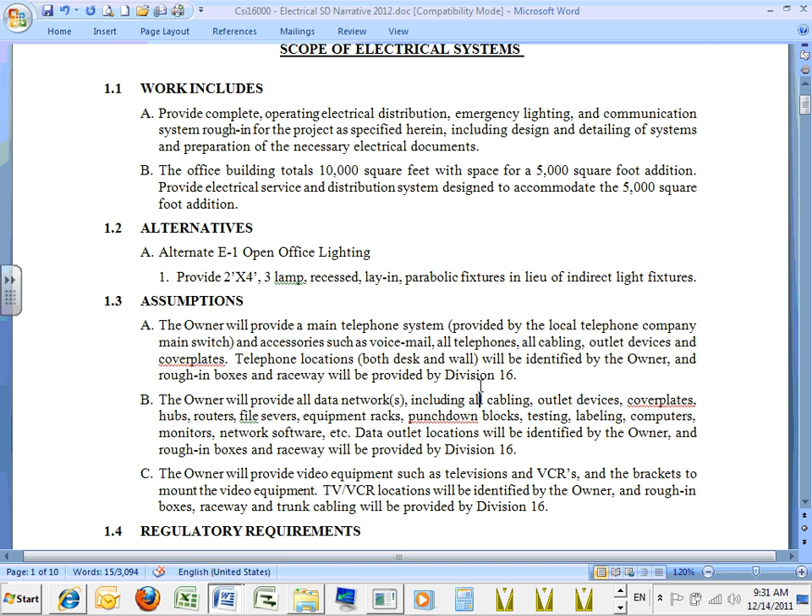Some of your assumptions: the owner will be providing a telephone system, accessories such as voicemail, telephone cabling, outlet devices, and cover plates. Telephone locations will be identified by the owner, which is Chad. And rough-in boxes and raceway will be provided by Division 16, so that's you guys.

And in Revit, they do have the ability to put in conduits if you want to take that on, you can, otherwise you can just do it with keynotes.

We'll provide all data networks, including cabling and outlet devices again. And you're going to be responsible for the rough-in boxes and raceways.

Televisions and VCRs, your video equipment, will be provided by Chad again, the owner. The locations will be identified by the owner, and rough-in boxes, raceway, and cabling again provided by Division 16.

Joe, do you want to say a few things about the low voltage? Because that's always been the confusing part. How do you guys do it?

And this as well? The way we originally decided to do this project, which has changed, is the way that a lot of projects are done. We as a designer, in a lot of our projects, and it's actually changing again.

We'll design a rough-in only for low voltage data and voice. So we'll design an outlet with an empty J box right next to it, with a pull string, with a conduit going up into the ceiling with a pull string in it.

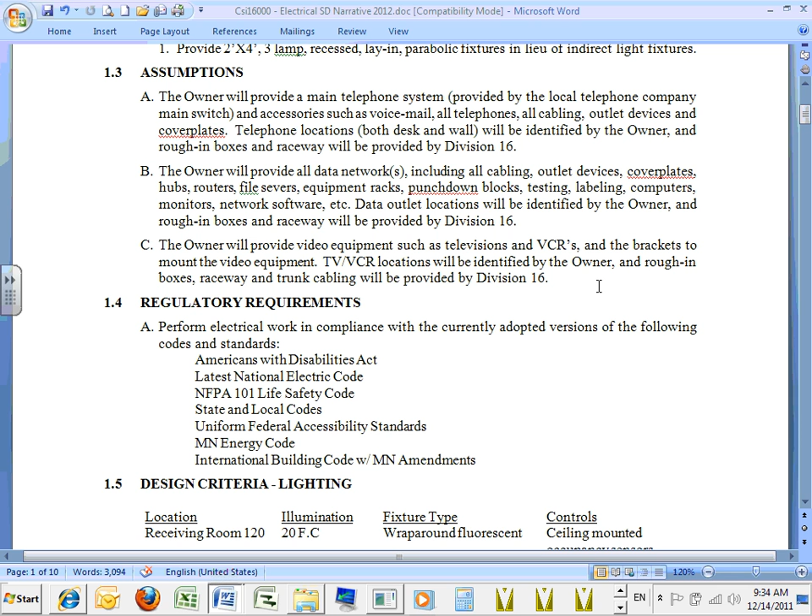Even now at Hallberg, we're starting to design more and more of our low voltage ourselves. It used to be a specialized deal that we kind of only wanted the data guys to take care of because we had enough of our own stuff to worry about. But even now, we're starting to do even more of that on our own, which with this project has evolved: we used to say rough-in only, now Chad's saying you guys design the data and the voice also. So he wants you to know where a voice outlet or jack is, where a data jack is, and the type of cabling you're using. So that's kind of the two differences of what is done.

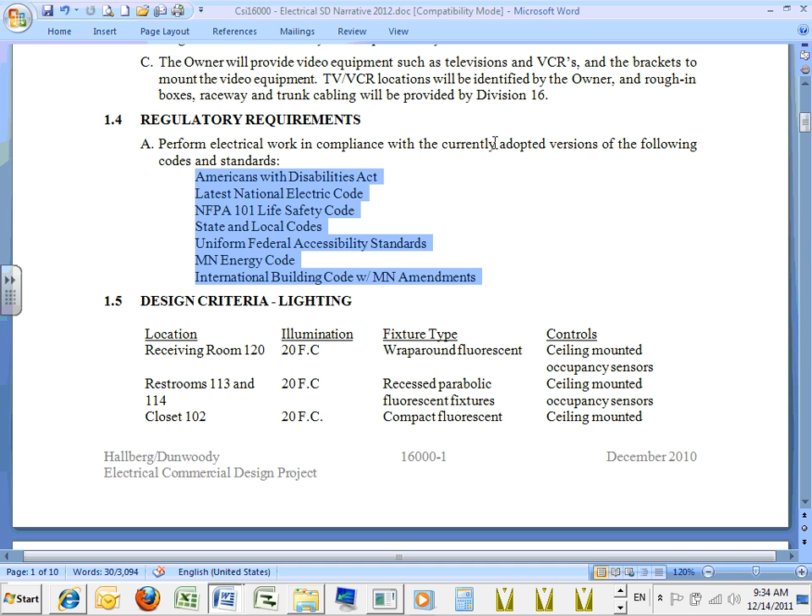Okay, so for your regulatory requirements, we need to be in compliance with the Americans with Disabilities Act, NEC, NFPA, Life Safety Code, state and local codes, Uniform Federal Accessibility Standards, Minnesota Energy Code, and the International Building Code with Minnesota amendments.

Below here is you have your individual requirements for each room. You guys will go through that with the individual to do your lighting calcs.

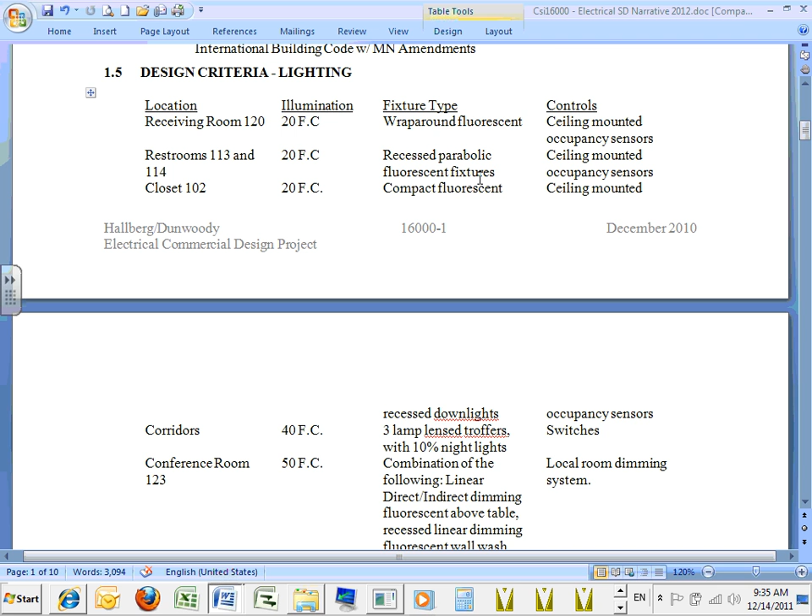I don't know that I need to go through each, I'll just say a quick summary. We're kind of giving you each specific room, how many foot candles, an average foot candle level that we want in each room, the type of fixture that we want in each room, and how we want it controlled. This document right here, we're giving you everything you need to design the lighting. And then as we move on, there's another section for power, where we say every single outlet that we want in each space also. So we're kind of giving you all the answers, in a way, in this document right here.

And I always say every year, and I always have a difficult time saying it because it always kind of comes off as arrogant. But if I was given this document at the beginning of a project right now, with what I know now, and this has all the answers, all the 73 meetings that I have to sit through with an owner at the beginning of a project to get all of this information — if I was given this right away at the beginning of a project, I think I could have this thing done in less than a week.

And you guys are going to be working on this project for 12 weeks. So use this as much as possible. Realize that all the answers are in here. If something doesn't make sense, obviously ask us and we'll clarify it.

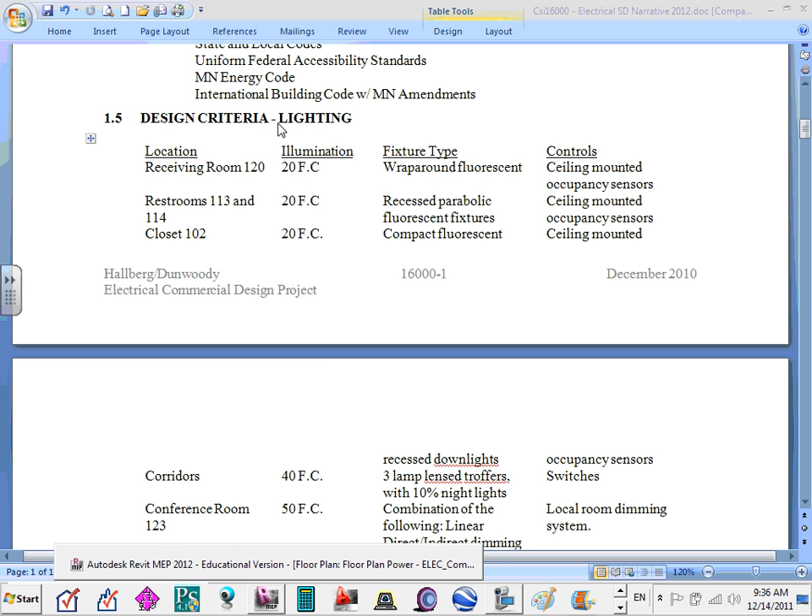One thing that was really unusual when I got out of school and into Hallberg, I thought this is what I was going to get per project. I thought I was going to get a sheet with the requirements and that type of stuff. It's nowhere close to what it really works. It's definitely a nice thing though.

Are you retained directly by the owner, or are you retained by architects? How is that? Both — oh yeah, we work for architects and we work for owners.

I guess we would probably rather work for an owner, direct with an owner, because then you don't have to go through somebody to get your answers. Because even when you work for an architect, depending on the architect, sometimes they want to be a part of every conversation. So you can't just call up the owner and say, what type of lighting do you want in your open office area? You have to say, hey architect, can I call the owner, because the owner is his client. So, but yeah, we work for both, and some architects are better than others. Some are great to work with. Some just say, do whatever you want and contact the owner directly, we don't care. And there's other architects out there that don't really understand what engineers, designers do, so they want to be in control. So we do both, and work is work, I guess.

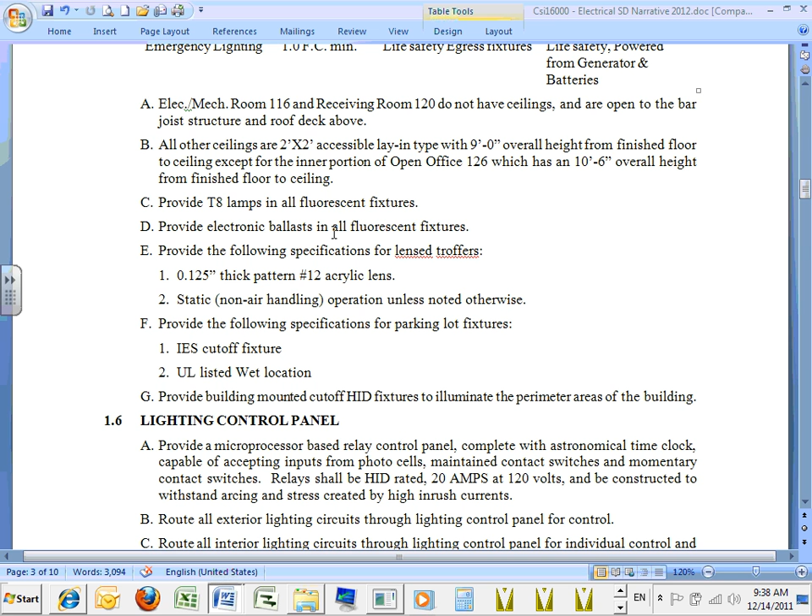So let's see here. We need to supply a light control panel with an astronomical time clock, with inputs from photocells, contact switches, momentary contact switches, and we're going to have those relays HID rated, 20 amps at 120 volts, constructed to withstand arcing and stress created by high inrush.

So we're going to route the exterior lighting circuits from the lighting control panel. The interior circuits will also run through the lighting control panel, and will be swept at the end of the day. Open office task lighting circuits will also run through the lighting control panel for timed on and off control.

So we've got a bunch of cubes at Hallberg, some of the J-boxes on the floor that will be running those circuits there, and those circuits will be run through your lighting control panel. The coffee pot in the lunchroom will also be on that lighting control panel for on-off control. So it's called the lighting control panel, but we're controlling the coffee pot.

So I don't know if you guys are familiar with the lighting control panel. It's also just a relay panel, but we're using it to control our lighting, and we're using it to control some outlets. We have task lights at each cube, and the task lights are actually plugged into an outlet. But at the end of the day, we don't want 50 task lights left on because people leave their lights on.

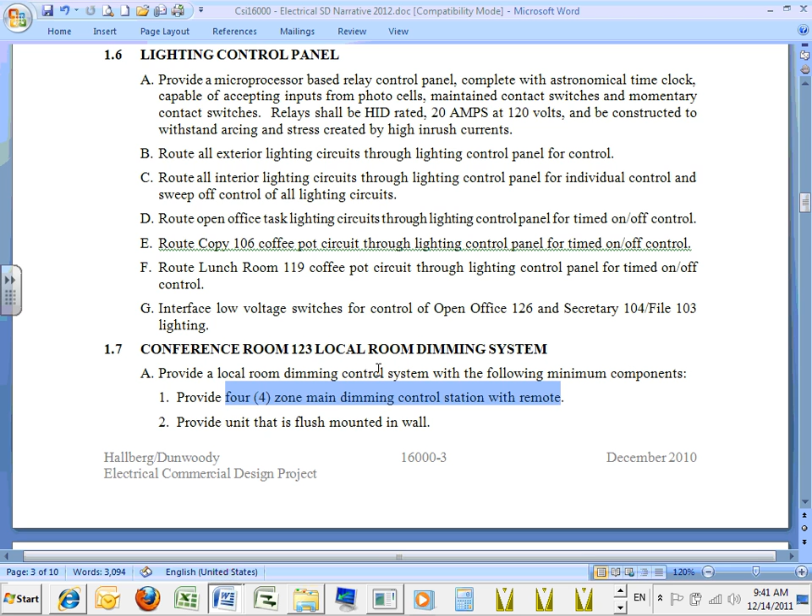We need to put in a dimming system on the conference rooms. It'll be 4-zone with remote, and it'll be flush mounted. We also want to provide required fluorescent interface modules.

And then below here we have your requirements for each room for the receptacles. You'll see that some of them are weatherproof GFI. We also have some notes, so make sure you pay attention to those.

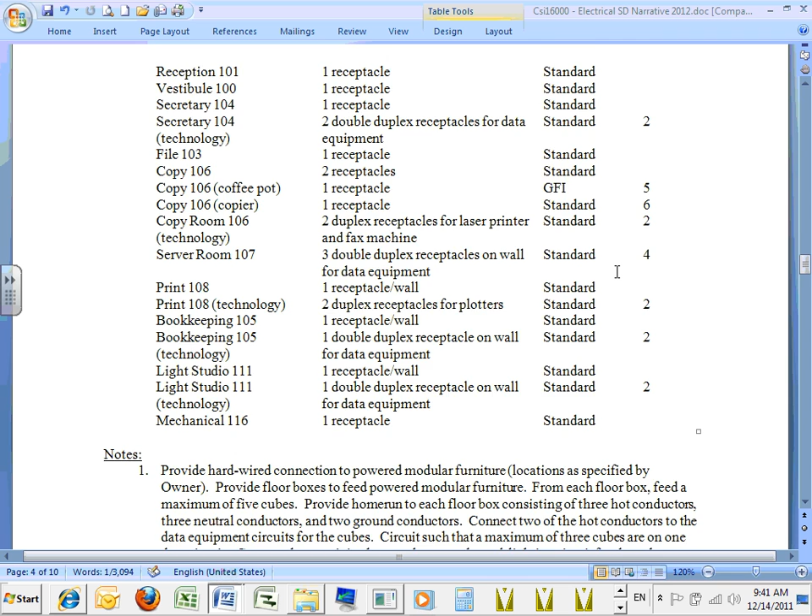There you go. And this will give you specific directions on what you need to do for each one of those things.

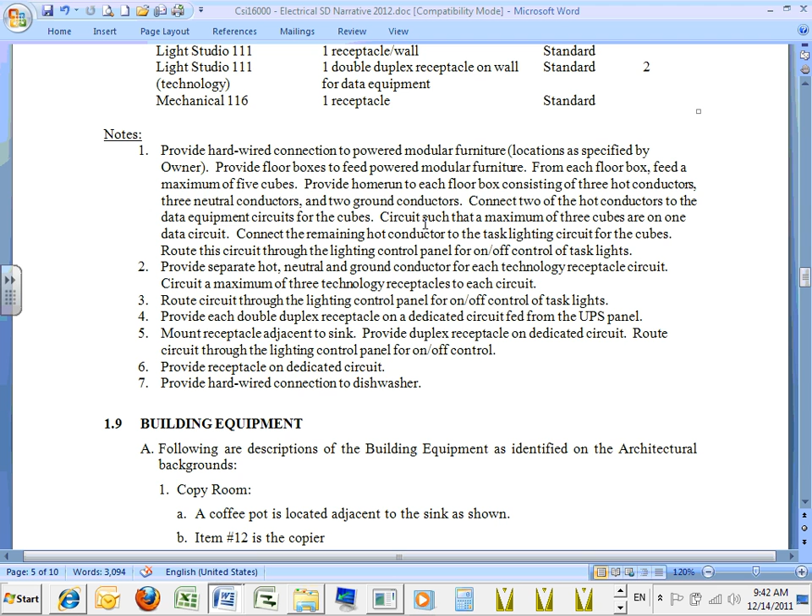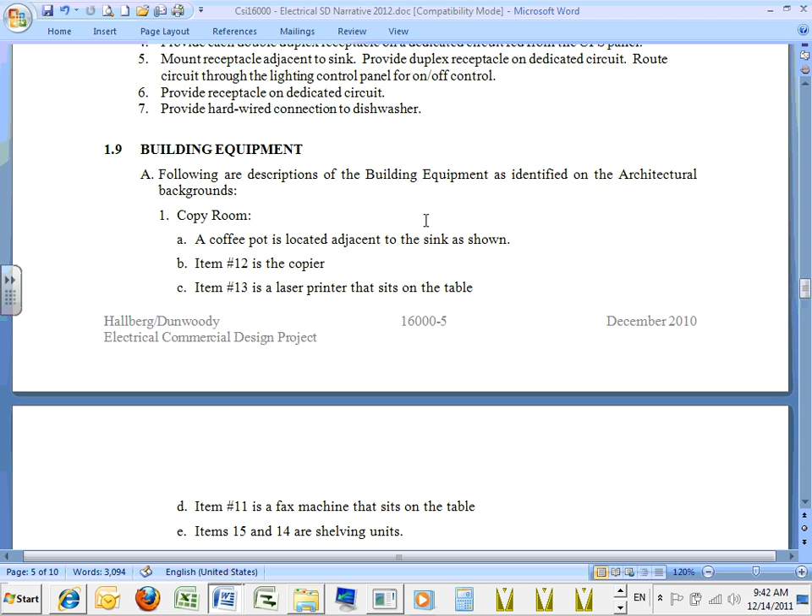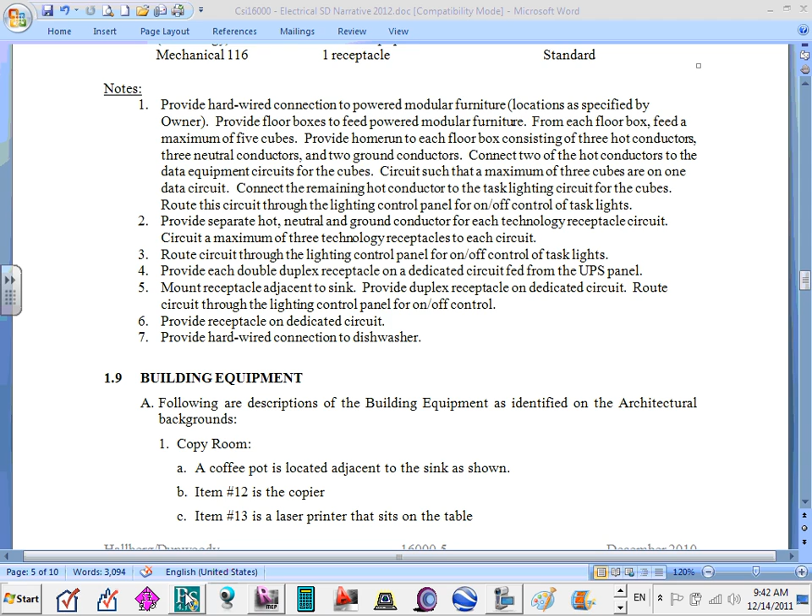This area? No, the one over here, this one. Okay.

Okay, we'll update them. The reason on this plan that's called a lease space - when I first started at Hallberg, that was a big empty room, including the 2 offices on the bottom there, and things were configured a little bit different. As we grew as a company, we ended up taking over our own lease space and putting cubes in there. You'll also notice when you come for the tour that there are some other changes that have been made, and eventually maybe we'll update our model to be exactly what we have. But for the most part, it's the exact layout that you'll see there.

So Nick, did you say that 127 you changed the number, or all of the numbers have been changed? The number is actually the same, it's just called Open Office 127 instead of lease space. There's a 127A and B - these here probably. Yeah, A and B, okay.

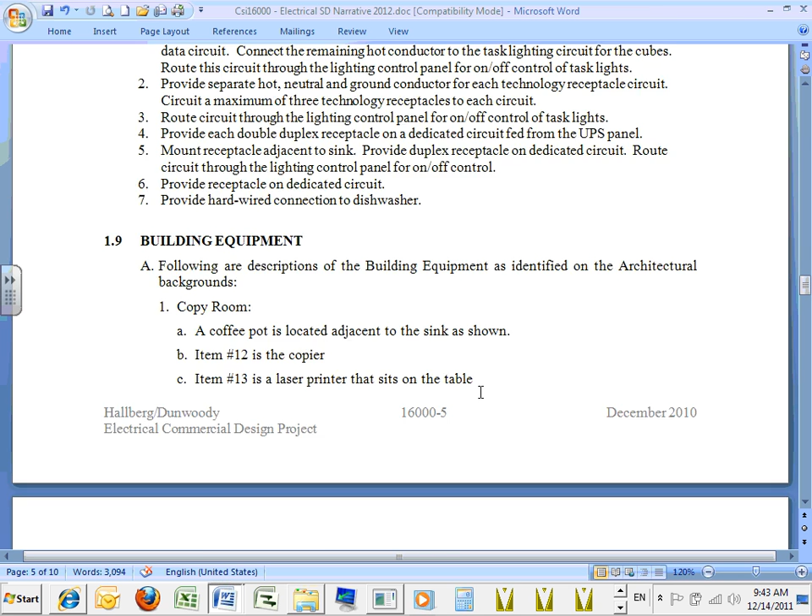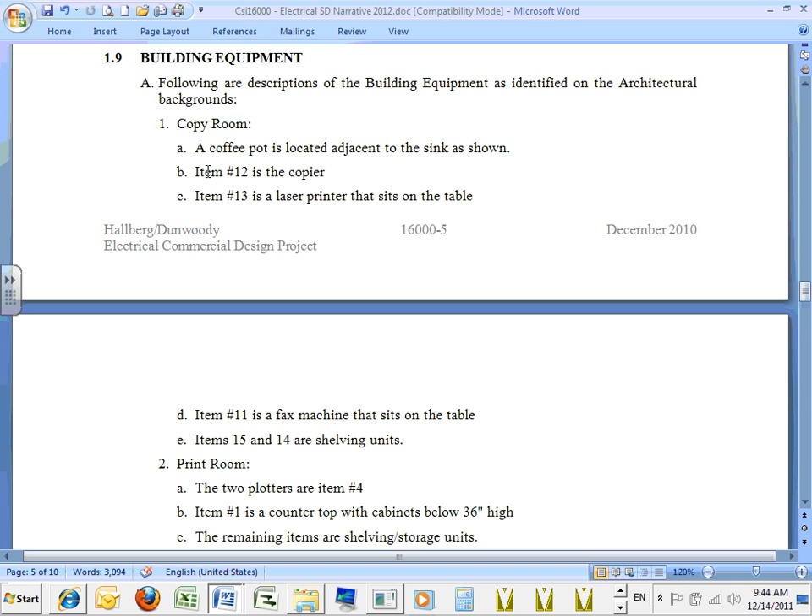Your descriptions - do you have this on the background? Yep, we do. So there's numbers on a lot of pieces of equipment. You'll notice that's where you find out what those numbers mean. So some of them might say file cabinet, which probably doesn't need power, but some might say printer. That's stuff you need to pay attention to.

It's kind of great to route power to the file cabinet. Back to the document.

All right, your electrical service - it's 208/120 volt 3-phase 4-wire, and provides a service entrance rated panel with main overcurrent protection device, which will be located in the electrical room. Then again, size of distribution panel to handle the addition, and we're going to feed the following loads: your lighting panel, your receptacle panels.

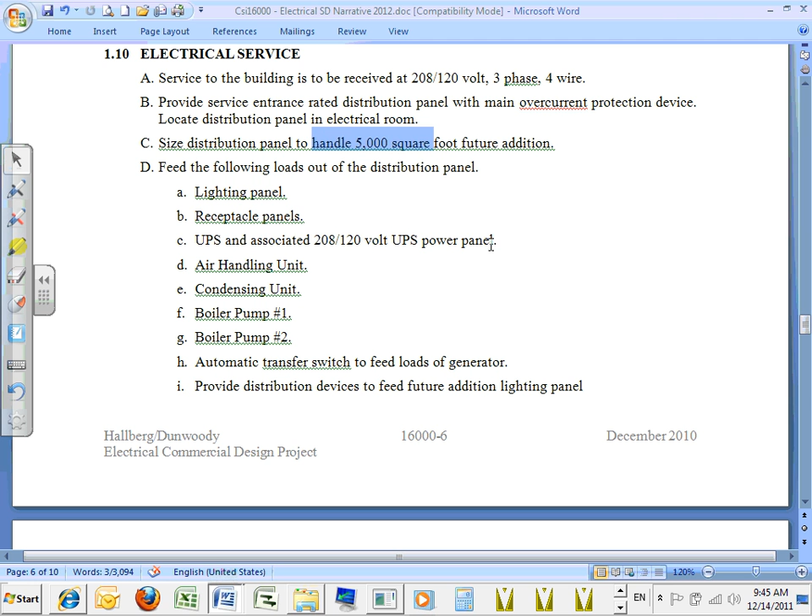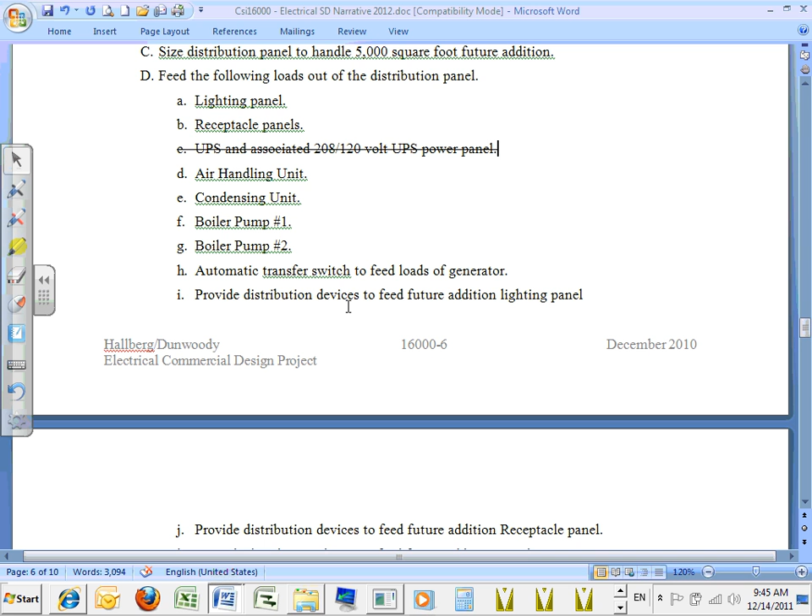We're getting rid of this one. Okay, so I'm going to go - there you go. Your air handling unit, the condensing unit, the boiler pump 1 and boiler pump 2, and ATS switch. And then distribution devices to feed additional lighting.

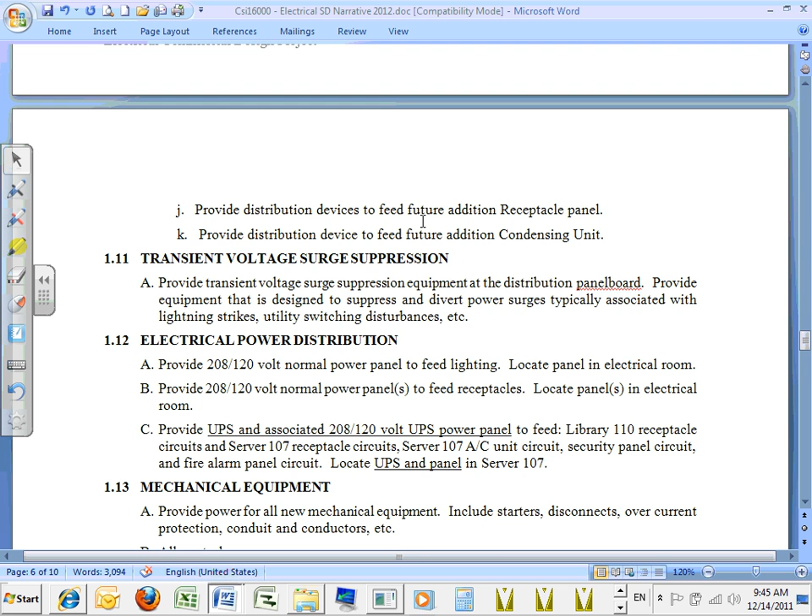Okay, and the additional receptacle panel, you want to take that into account as well, and the additional future condensing unit.

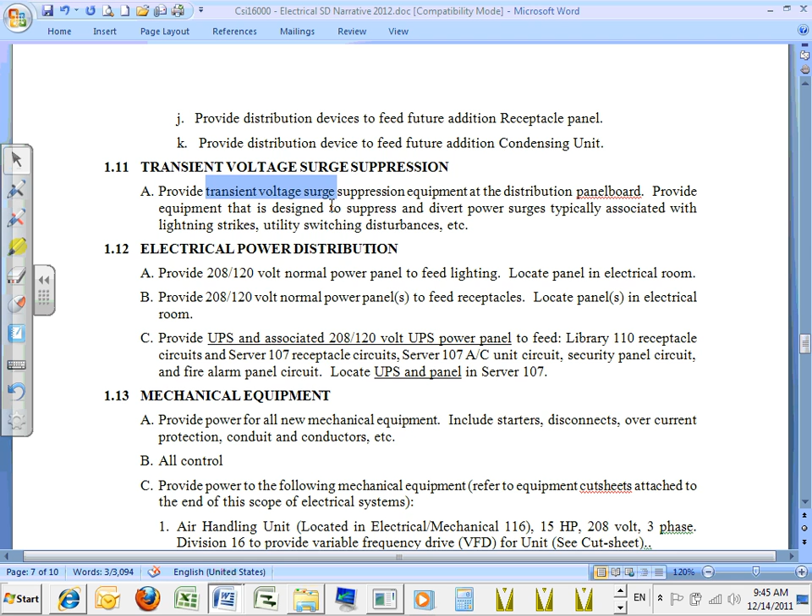On your main board, they're going to add a transient voltage surge suppression unit, and you can just add that as a keynote on your keynote panel. That's something I would talk to your panel guy at Cutler Hammer. If you don't know what TVSS is, don't understand anything about it, which I know I didn't, ask him. Just how do I get it on my main service? What is it? What does it protect against? Those types of questions are good questions for your Cutler Hammer guy.

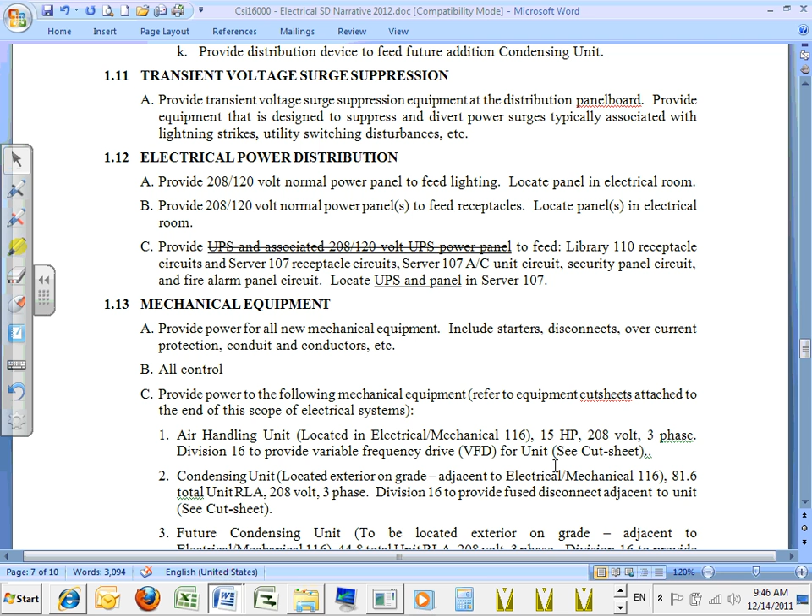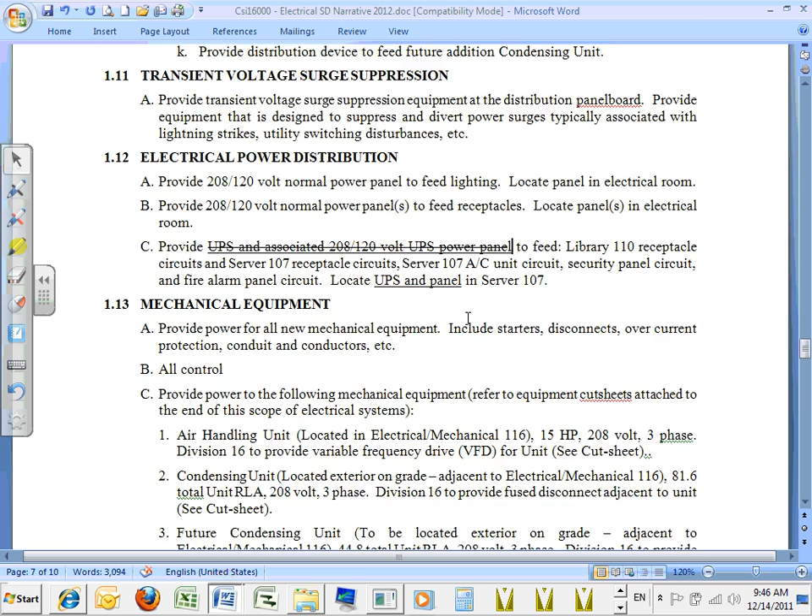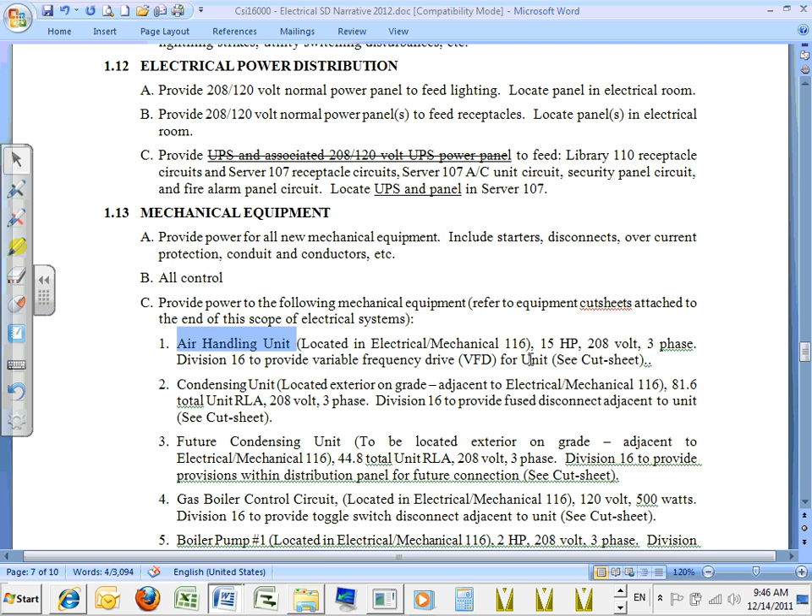And you have your little blurb here on your power distribution and what's to be fed. For your mechanical equipment, you need to include your starters and disconnects, conduit and conductors, all control. And down here you'll have your list of all your mechanical equipment that needs to be powered, and all of your load, right? Your load, 15 horsepower. You can go into the NEC and figure out how to size your conductors.

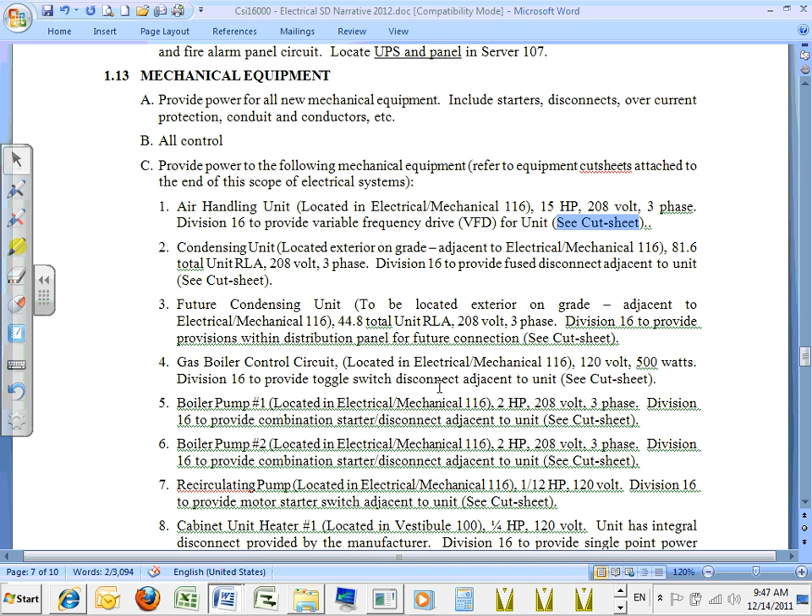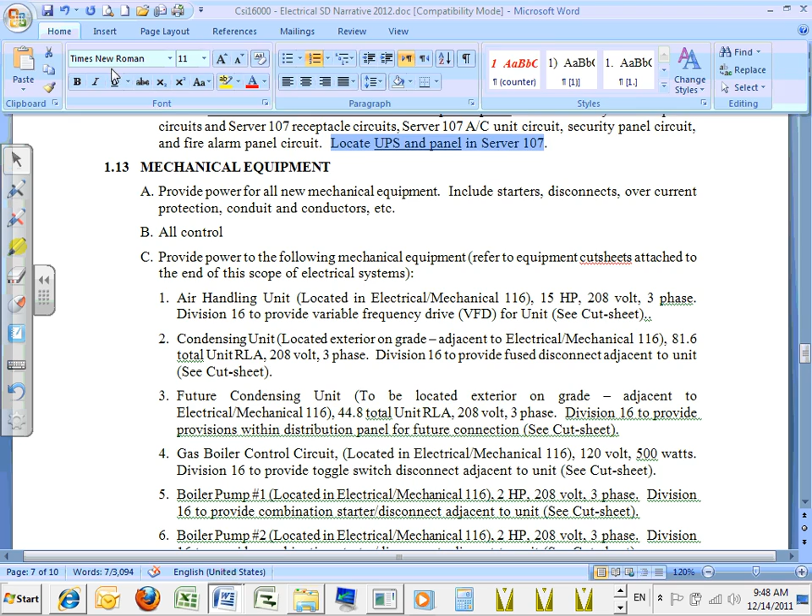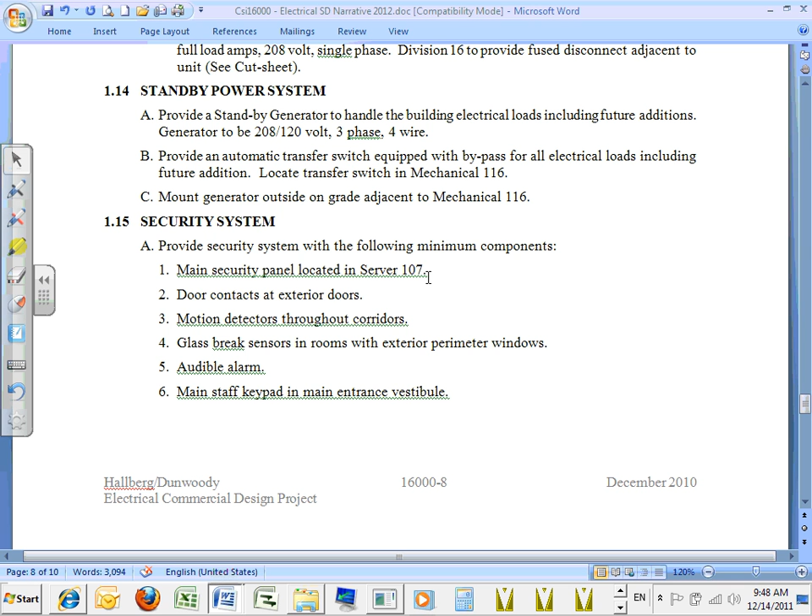What I say too is that once you're doing this project, nothing changes - it's pretty much on the sheet and you just go. I wish that's the way it was in the real world, but it's not. It's changing constantly. When we did this in CAD, we actually used to spring a background change on it. We'd have the building laid out one way, and then we'd try to play architect and say, 'Oh, the background change, we're the owner, we want this instead.' So walls would move, and we'd add offices and really tick you guys off. But now that we're in Revit, it's one plan, and we're sticking with one plan. So we probably should still spring that on you guys, but this year we don't. When we get smarter with Revit.

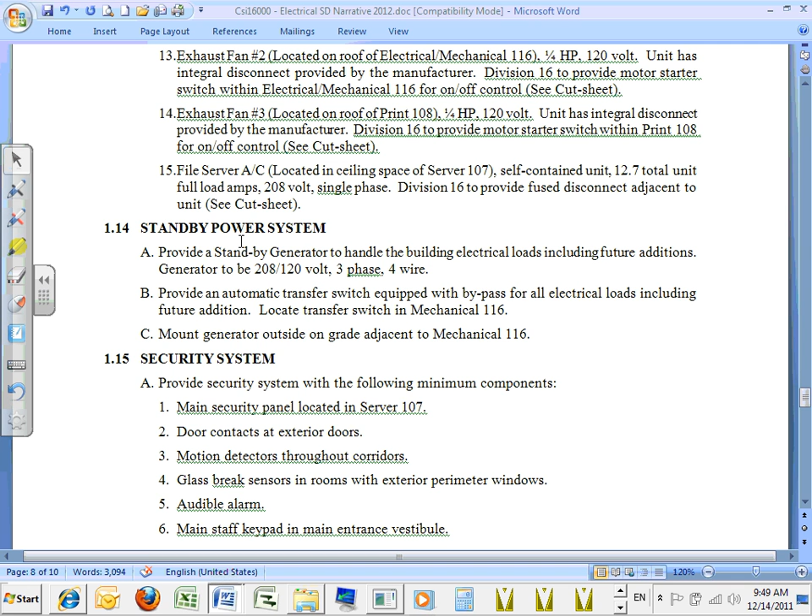One thing that is pretty interesting now is we end up doing a lot of remodel work. So one thing that we don't address in these projects is what you demolish, take down, and then reinstall new equipment. Maybe at some point that'd be something to add in. But just get ready for that, because you're going to see quite a bit of it.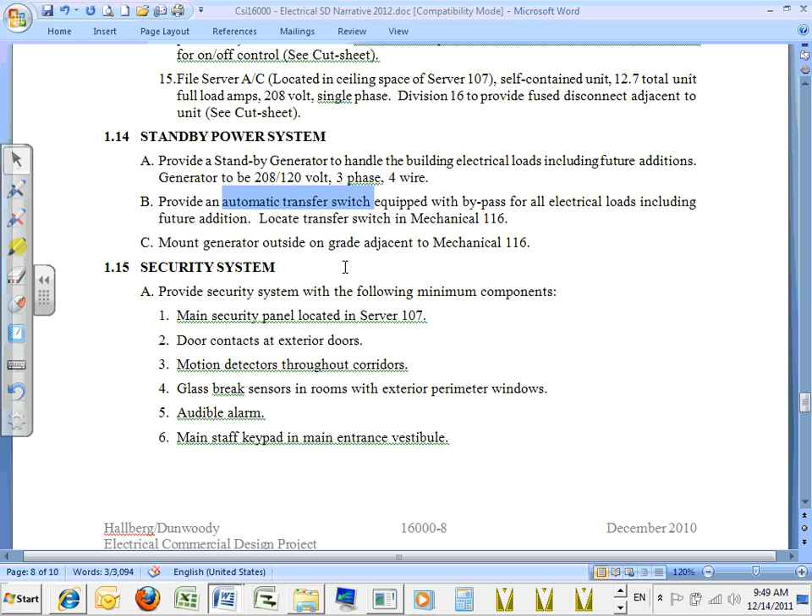Your standby power system will be required to provide a standby generator to handle the building electrical loads, including your future additions. The generator is 208/120 volts three-phase, four wire. We'll need to provide an ATS switch equipped for bypass for all electrical loads, including future addition, and that will be located in the mechanical room. We'll mount the generator outside on grade, adjacent to the mechanical room.

And one of the things I can show you guys how to do in Revit, which is pretty simple, is I'll show you how to make that concrete pad - something to set that generator on.

Security system - we need to provide one with the following minimum components. Main security panel located in server 107. Door contacts, exterior doors, motion detectors for corridors, glass break sensors in the rooms with exterior perimeter windows, and an audible alarm and a main staff keypad at the main entrance.

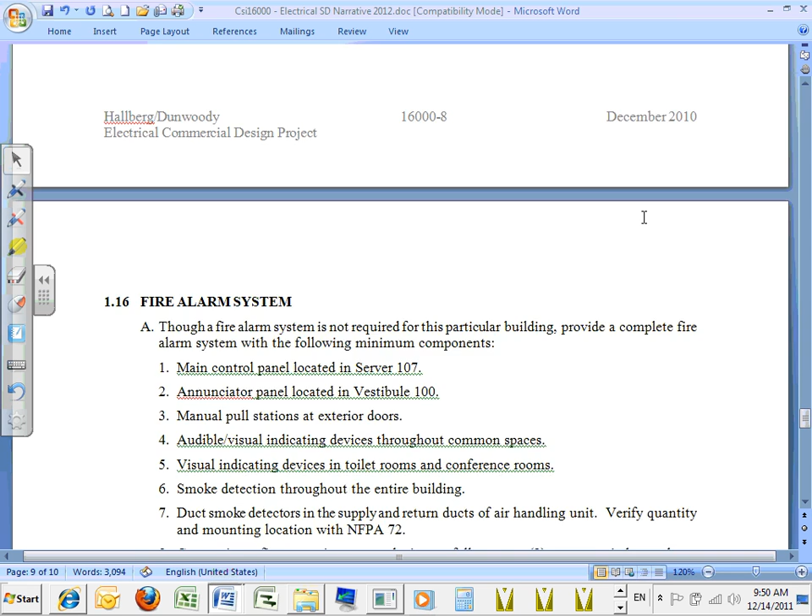I think content might be an issue for some of that stuff, the keypad. There's some sites out there that have some content that you guys might want to take a look at, like Revit City. I don't know if you're familiar with that, but there's a lot of different models that you can pull down and use in your content.

Are we doing without any supply and return duct stuff?

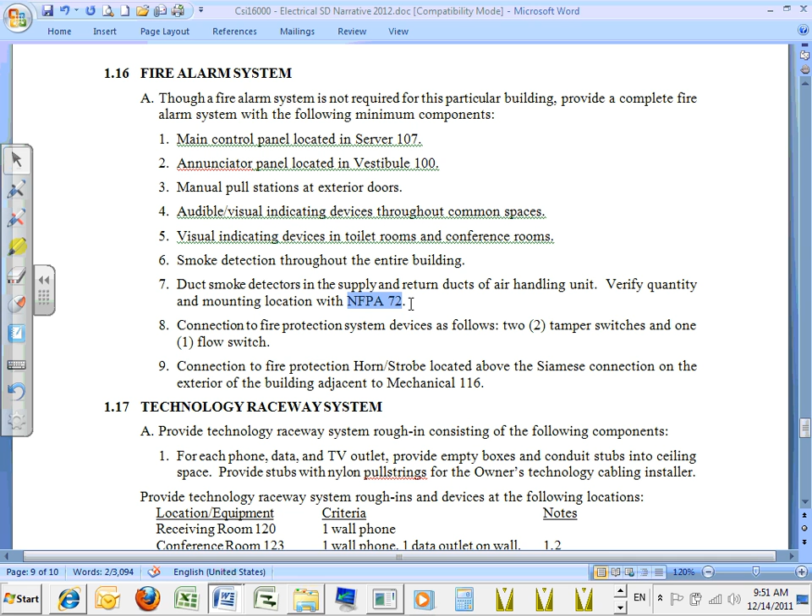We'll find out when we come in and talk about fire alarm.

Connecting the fire protection system, you need tamper switches and one flow switch connected there. And we'll need a horn strobe located above the Siamese connection on the exterior of the building. That's basically your place where the fire department hooks up to the water supply for the building. So one strobe right above it.

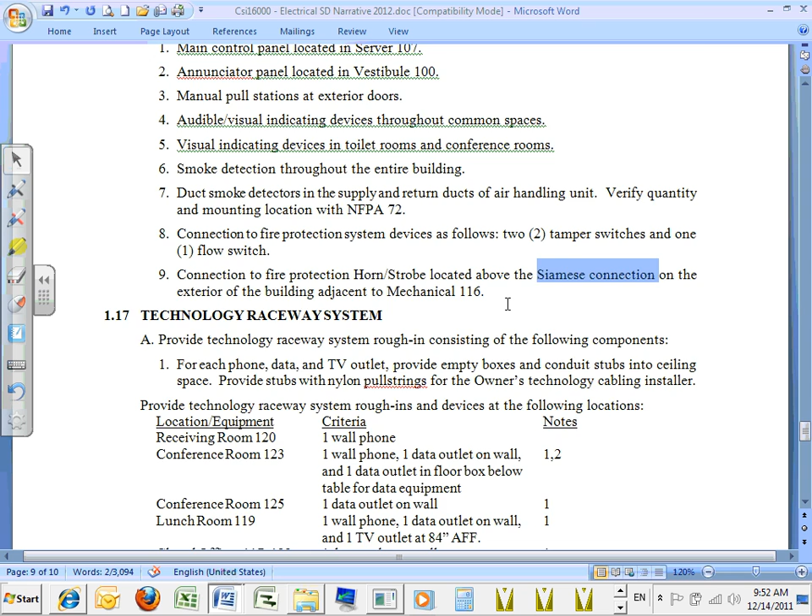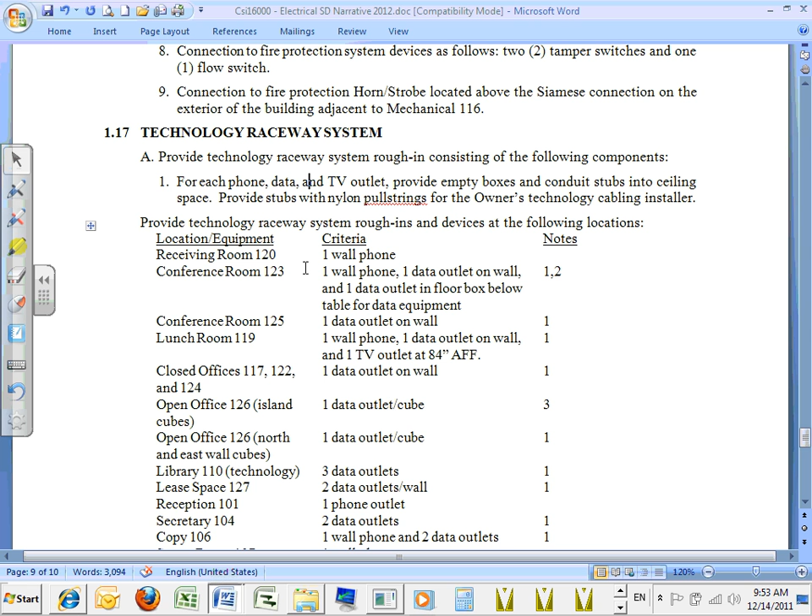Here's your requirements for the technology raceways. So is this going to be just stub-ups? Yeah, stub-ups into the ceiling. If you want to do that and run it, I can show you how. This talks about stubs with nylon pull strings, but that's incorrect because you're designing the entire voice and data system for this building. So that gives you the requirements of what we want where, but you also need to strike that and specify the specific data and voice connections in each room. It's an addendum.

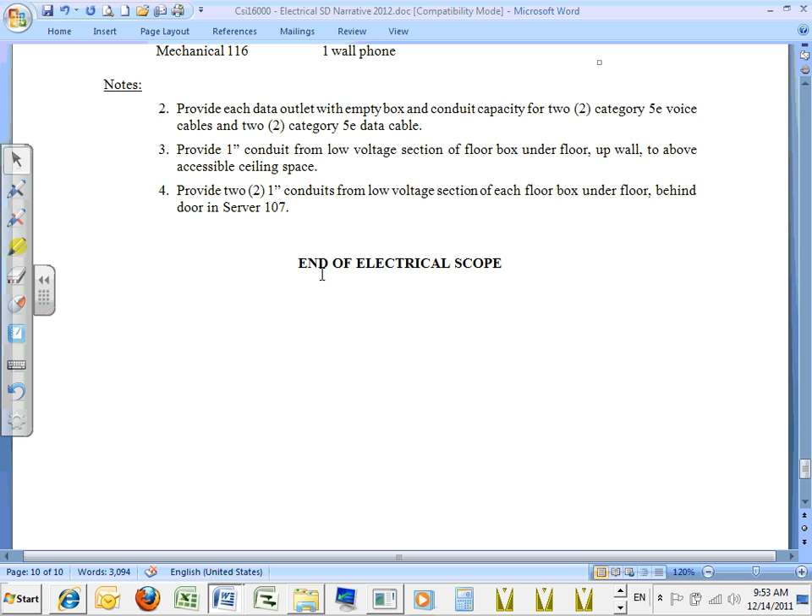Are you seeing much in the way of totally wireless in office buildings in this area? As far as data, you mean? I come out of that field. One time, before I left Seattle, they were going hugely wireless, and that kind of radiates out—the whole thing, full monty, voice, data, everything, totally wireless. Plug your business in with surrounding receivers, transceivers. So the question is, do you see that here, or is that still wiring?

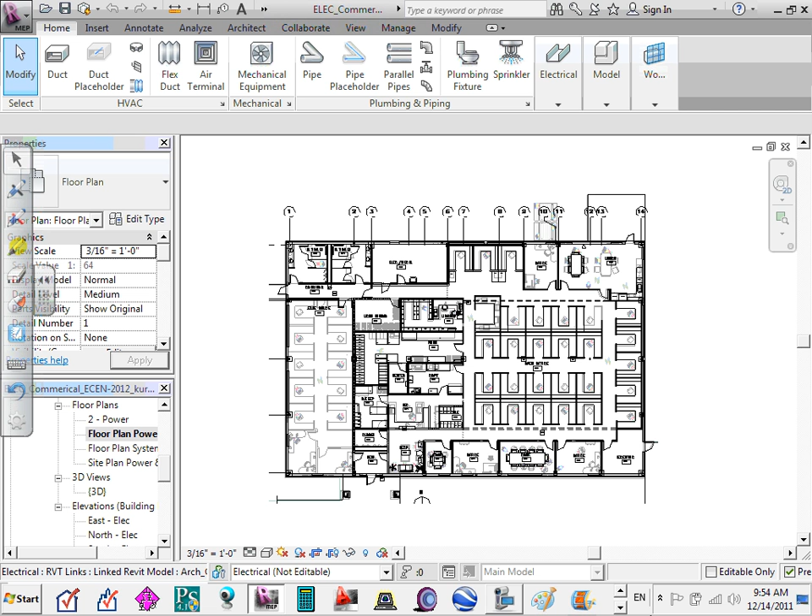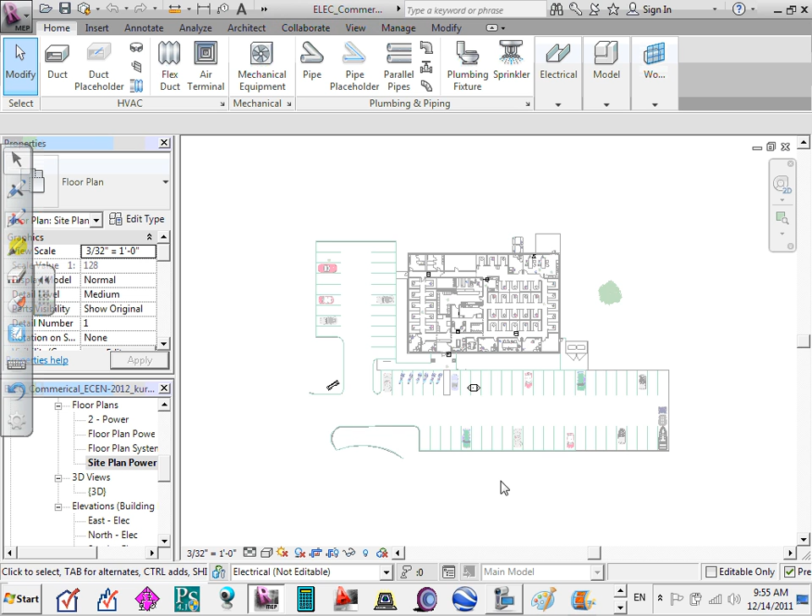We do see that in a lot of our designs. We're almost doing both—a lot of people still have a workstation and want to plug their computer into a hard data connection. But a lot of schools will throw wireless hubs down the corridor, so there's wireless throughout the entire school. There are little study halls or nooks in every school where a kid can go and sit, maybe more in the higher ed part, where kids want to sit down when they're not in class and do their homework. So yeah, we do see a lot of it, but like I said, we're seeing both the hard connection and the wireless connection.

Some of the chat questions too—are there any state, federal, or local codes and standards that apply for jobs? The first thing that comes to mind with that is parking lot lighting. Every city is different with the requirements. A question right away might be, where is this building located?

Well, it's in White Bear Lake, Minnesota. So one of the things you might want to do is go on to the White Bear Lake website. What I have to do with every project, when you get to the site lighting, is find out the requirements for that city. White Bear might only allow a 20-foot high pole. Normally when I design a parking lot, I like to put 30-foot high poles, but specific cities only want 20-foot high poles. Also, certain cities want foot candle levels to be zero at the property line. That's sometimes more difficult than it sounds with parking lots, especially with businesses abutting each other right next to each other. So you need to specify a fixture that has a cutoff shield on it that puts all the light forward and nothing spills behind it. That's one of the things I find I have to do on every project when I design parking lot lighting.